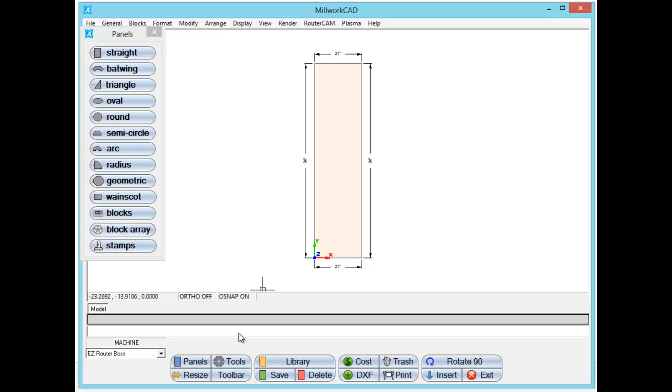I'm going to go over here and select the tools, then select the side arc tool. Select the side I want to add an arc to. I have a 16 by 8 inch arc already, so I'm just going to add that to the panel.

So we have our shaped panel here. Now let's make the fastening holes, the CNC operations. I'm going to go to drill, select the top to reference these from, and select my 5mm screw holes. I'm just going to preview those and insert them.

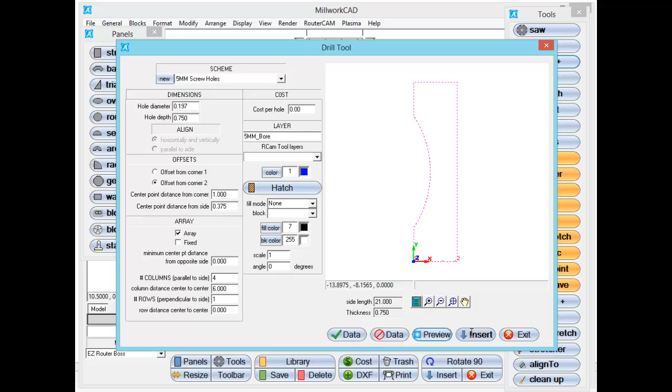So if you look here, we have the holes at the top. I'm going to go back to my drill tool, select the bottom of the panel this time, choose the exact same setting, and insert those, because it references from the side you select. So we have our construction holes at the top and bottom of this panel right now.

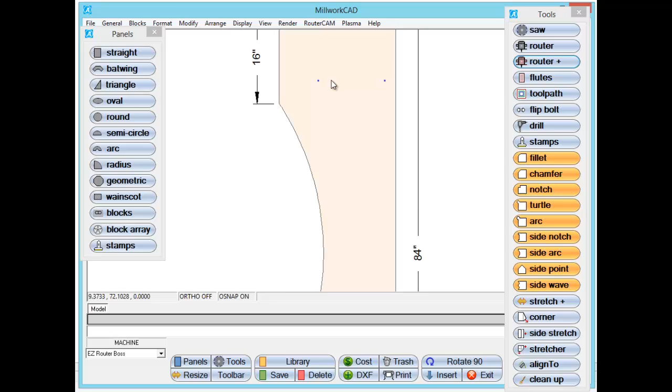I'm going to go back to the drill tool and select the top of this panel again. This time I'm going to select my holes, which are basically a couple of locating fastening holes for the top shelf or the metal brackets going across the locker.

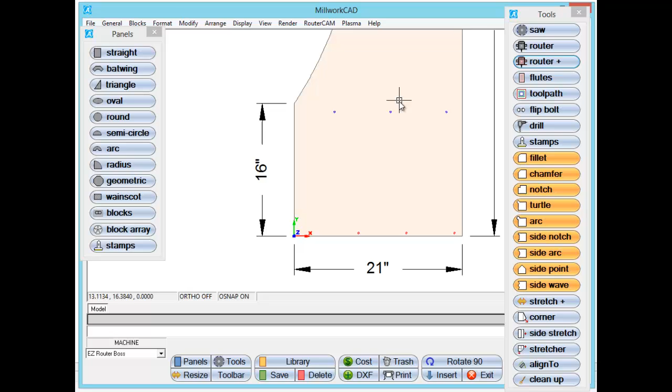Then I'm going to go back to drill and select the bottom, and we're going to use my bottom holes. We're going to add those, which, if we zoom in here, are the holes for the shelf or the seat top to go across there.

So we've created a side of a locker. If you only want to do one of these, I can go ahead and just send that to code. But what I want to do is, let's say I want to do 20 of these lockers.

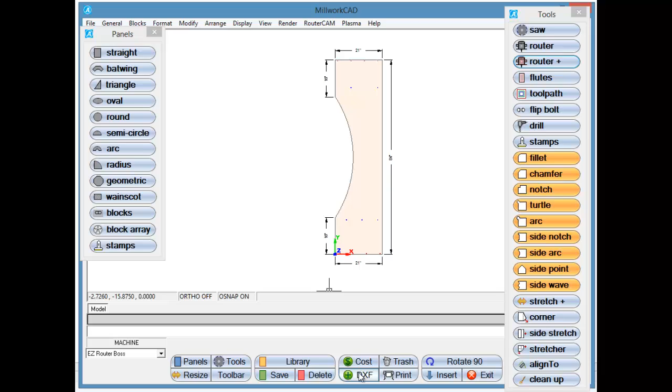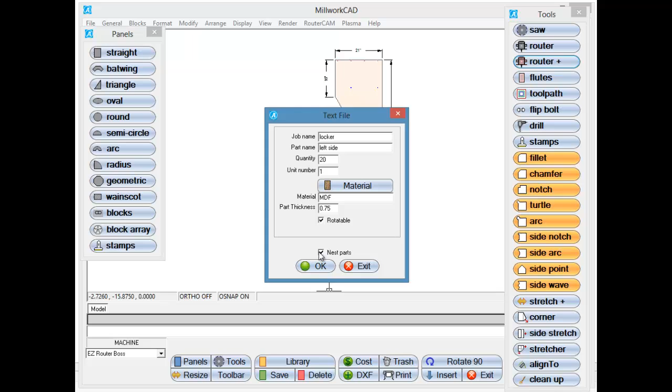Okay, so I'm going to go to DXF out. I'm going to call this locker, left side, and let's say I want 20 of those. I can select the material here I want to make it out of, but what I'm going to do is check the nest parts option. I'm just going to click OK here.

I have a today's work folder, I create my own folder. Matter of fact, I'll just create a folder real quickly and call this lockers. Inside lockers, I'm going to save the left side and select save. Okay, I'm pretty much done with that.

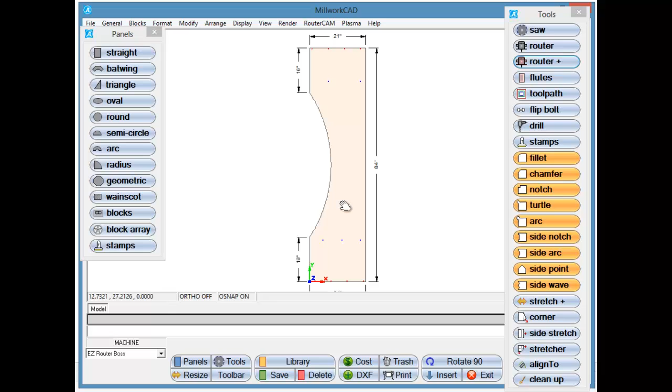I don't want to go through all the trouble of remaking the right side because it's just like the left side. So I'm going to go back to my toolbar, open this up, slide it up here where you can see it. I'm going to take the mirror tool, pull this down here so you can see it. I'm going to tell it to select everything in the drawing, and I don't really care which way it mirrors here. I'm just going to tell it to delete the original and click OK.

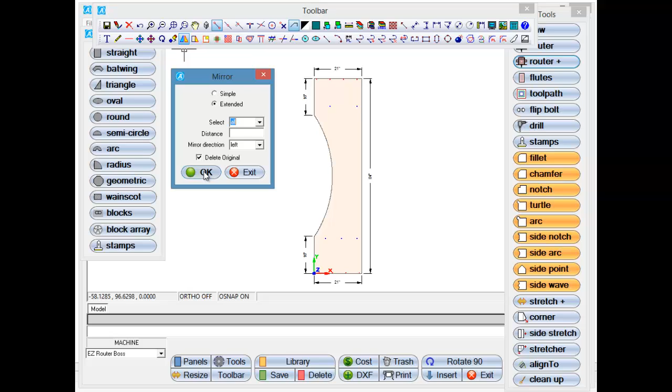And now we have our right side. So I'm going to go to DXF out, and we're going to call this right side. I'm just going to take and copy that, paste that, and let's say I want 20 of those.

This time I'm going to recheck - I want to nest these parts because I want to go ahead and expedite this little drawing. So I'm going to click OK here, and we're going to save this as right side.

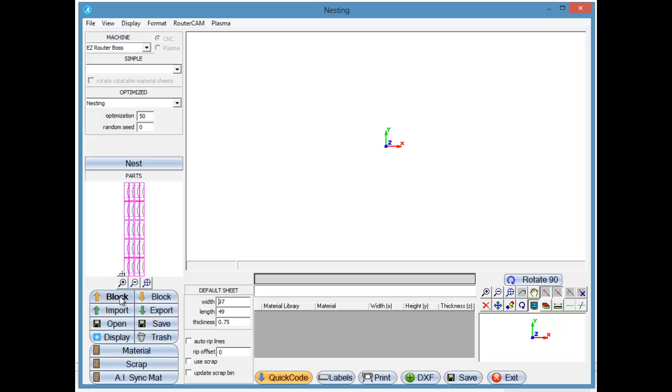It's going to go ahead and open up our nesting. I'm going to tell it OK. So here's our 20 parts here. Now I want to also add in the left side, so I'm going to click this, go back to our lockers folder, and add the left side.

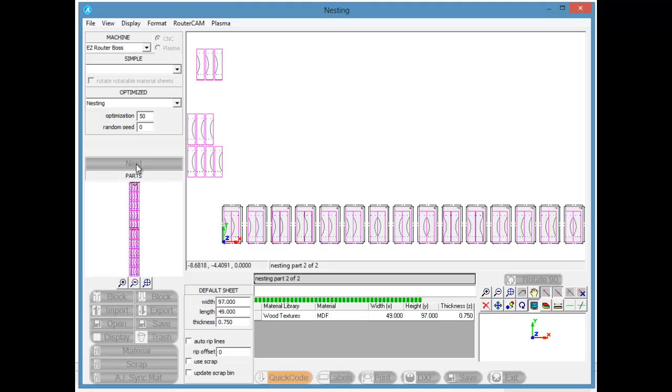That's going to automatically bring in those other 20 left sides. I'm going to tell it to nest. There's all of our sheets done and laid out. It's only going to get 2 per panel for the way I've got this thing sized. Then I'm just going to go quick code, and the program is going to march through and create all the G code for all the different panels.

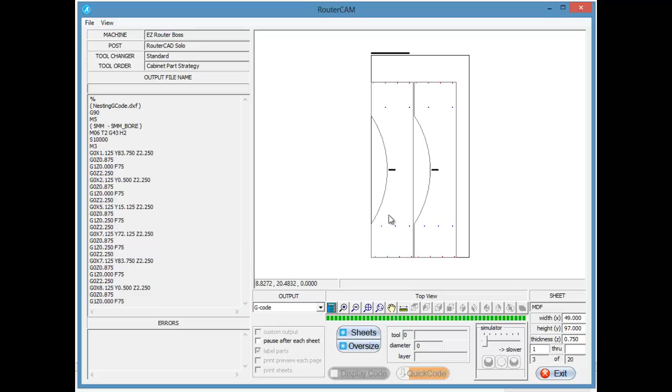That's how simple and straightforward it is - just create a specialty part or a locker side or whatever you need to do.